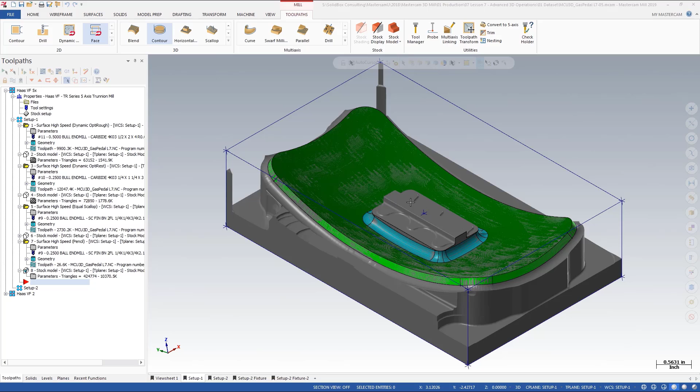Let's carry on with the file from our previous example and start to clear off the area where we bolt the fixture to the back of the pedal for setup 2. To get started, I'm going to use the dynamic 2D face operation, and I'm going to take care of this on the top section of our part.

You notice that as I make my selection it doesn't automatically chain the top. So I'm going to clear the selection, make sure that I use the closed option, and select this upper edge. 1/4 inch flat end mill. The width of the face is fairly small, and we want to use the 1/4 inch end mill to do the clearing on the next face down. And this will prevent us from having to do a tool change between.

So the comment is going to be DYN face, because I'm going to do a dynamic facing operation. Under cut parameters, I'm going to change the style to dynamic, and I'm going to leave all the default settings, with the exception of stock to leave on floors, we want to set that to 0. I'm going to turn off depth cuts because we don't have much material left here.

And on my linking parameters, I'm going to set my retract to 0.1, my feed to 0.05. My top of stock, I want to make sure that I reduce this value. I'm going to click on the top point, but then I want to increase this value to minus 0.65. And for the depth, I'm going to manually select the top and use that as my value. So from here, we're going to say OK and allow it to create that operation.

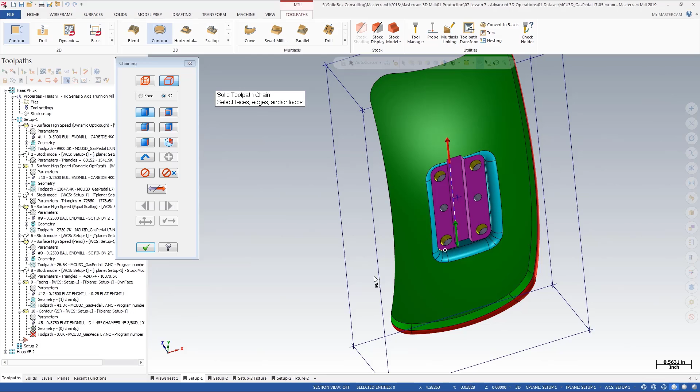Next, I'm going to use the 2D contour operation. And again, we want to make sure that we're using the appropriate selections. So I'm going to make sure that I have the single edge, and I'll grab this edge for my first selection and this edge for my second. Once they're selected, I want to go back into the chain geometry. I want to make sure that they're pointing the appropriate directions. You'll notice the smaller green arrow is pointing outward on both contours, so we're good to go here.

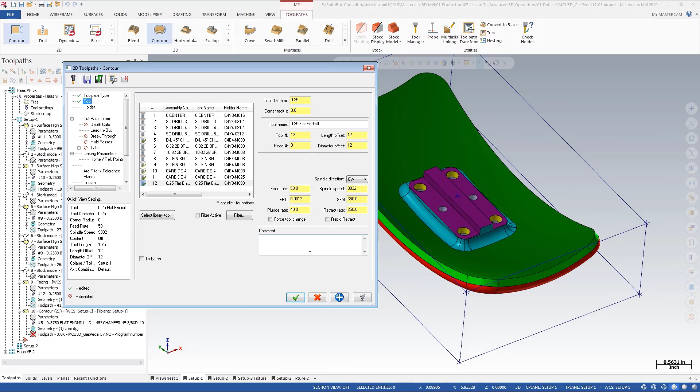The tool, we want to carry on using the 1/4 inch flat, and I'm going to comment this as contour. For cut parameters, I'm going to change the compensation type to wear and leave the contour set to 2D. Make sure that we're not leaving any stock. And in the lead in lead out section, I want to reduce these values. I'm going to do a 0.1 length, a 0.1 radius with a 30-degree sweep, and I want to push that over to the exit as well.

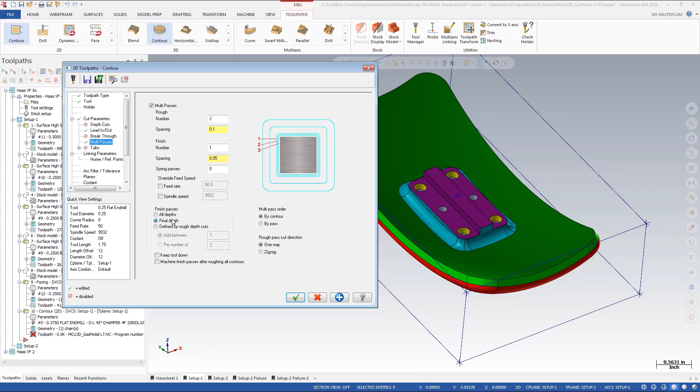Gouge check turned on. We are going to turn on multi-passes because we need to make sure that we have at least a secondary pass to clear off the entire face. So I'm going to say 2 roughing passes at a 0.1 spacing, and I'm going to do 1 finish pass. I'm going to do the finish pass only at the final depth and only cut one way.

For linking parameters, again, we want to reduce these values. I'm not going to be using clearance here because the part has already been faced and cut down so much that I don't need to raise to a clearance level. I'm going to use 0.05 on the feed. I'm going to set the top of stock to this point, and the depth is going to be my contour selection, but I'm going to be sure.

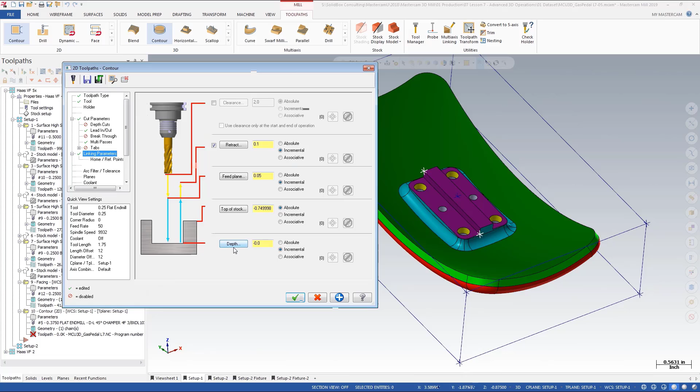And now you can see, because we didn't use the higher retract plane, the tool is only stepping up a small amount. Let's go ahead and select operation 9 and 10 by holding down the control key, and let's do a quick back plot. Let's just take a look where the tool is going and how it approaches those contours.

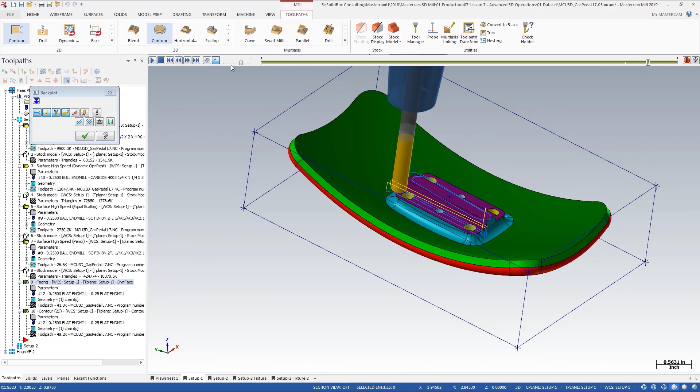Now this is not a dynamic operation. We're doing a standard 2D contour operation. But this is going to be applicable here just to clear off these faces and get a nice square cut in that bottom edge. We still need to drill some holes, add a small chamfer on this corner, not modeled, but for right now let's move on to the next step.